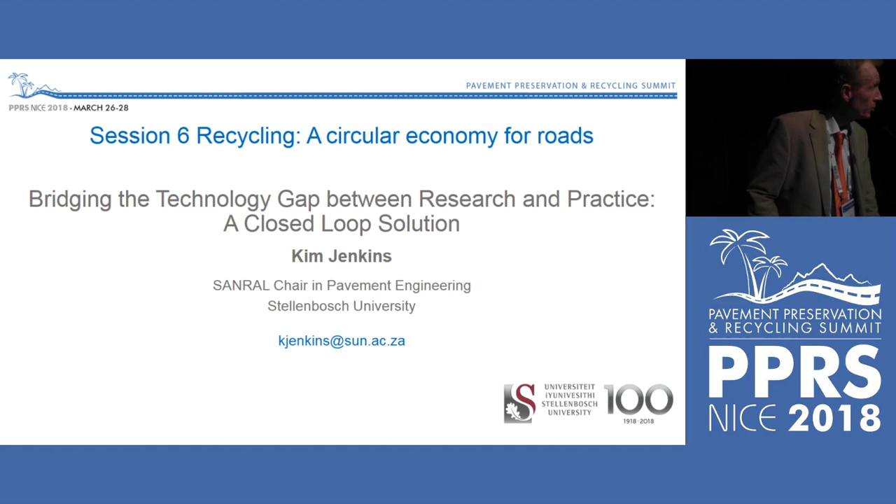Thank you for the introduction, and thank you to PPRS for this invitation. It is so encouraging to see the developments in these efficient technologies in terms of energy and emissions and other very important issues, and I would like to join in explaining some developments.

I have a four-part presentation where I would like to talk about, in particular, some of the problem solving, and as you can see, it's the typical loop solution to problem solving. With cold recycling, as we've heard from a previous speaker, there are some needs and challenges, particularly in mix design and pavement design as this technology matures.

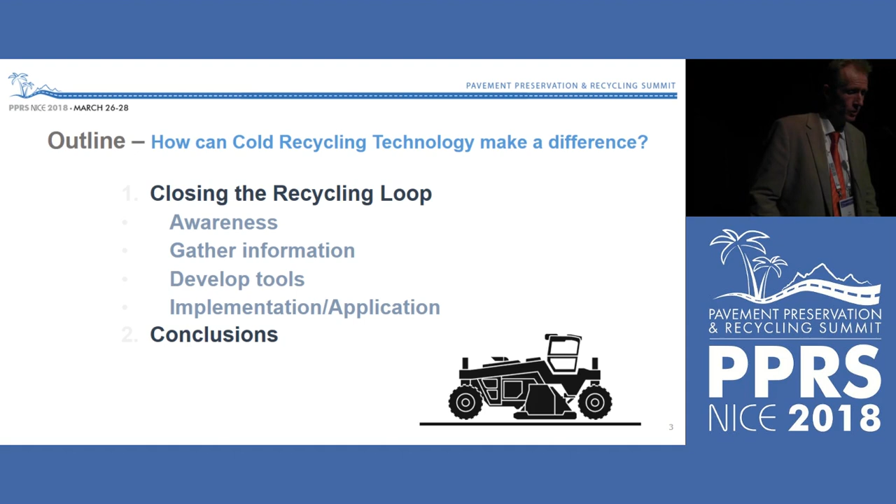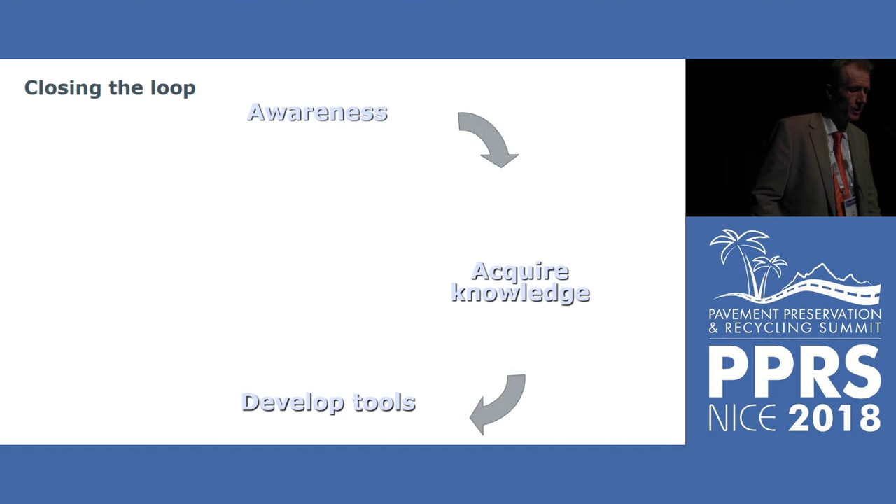So I'd like to take you through this loop. We know that we need to be aware of what the problems are. We need to acquire information and knowledge in those areas, then develop the tools and implement. But I think an area where we all commonly fail is in closing this loop and refining the technology.

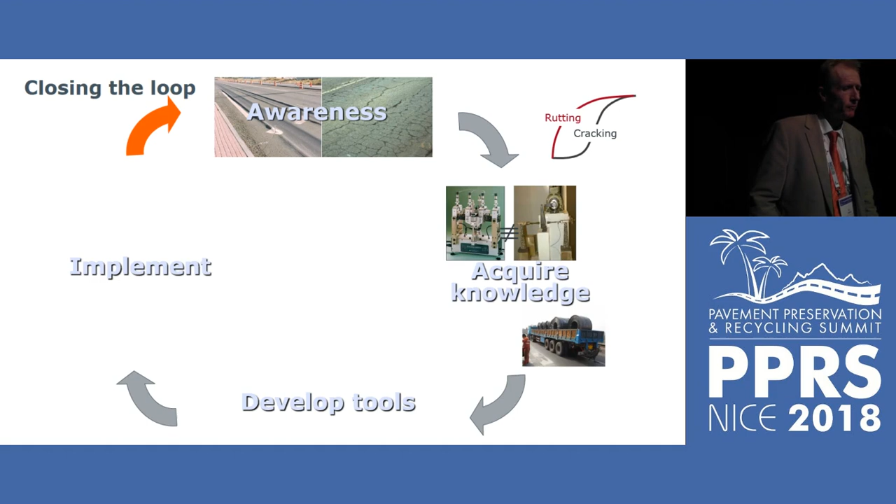So we're aware of the types of failure mechanisms. We know how to gather the information and acquire the knowledge and develop the tools, and I'll share a little bit about that with you. But then we implement, and that's generally where we stop.

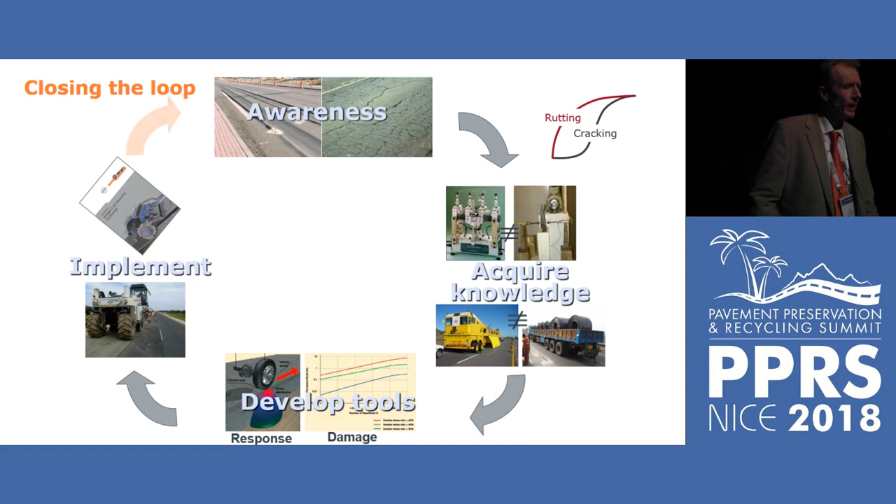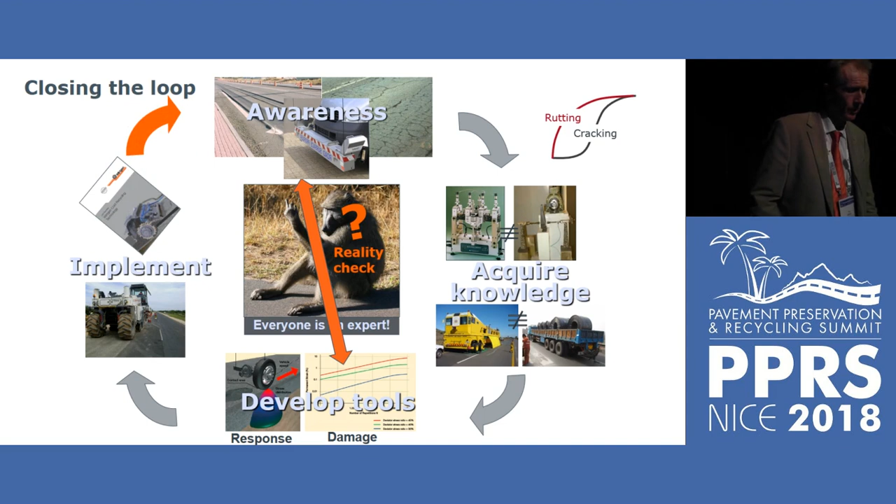And we are faced with criticism by people who don't enjoy our roads. So we need to close this loop, do a reality check of this implemented technology and how it performs over time. This is not like that sign that says 'free beer tomorrow' - if you don't close the loop, you go back again tomorrow and the sign still says free beer tomorrow. So we need to close this loop.

So in the first step, just awareness of the challenges we're facing - and I'd like to emphasize these numbers are conceptual. We know that globally there's on the order of 65 million kilometers of roads, of which about 18 to 20 million kilometers are surfaced globally.

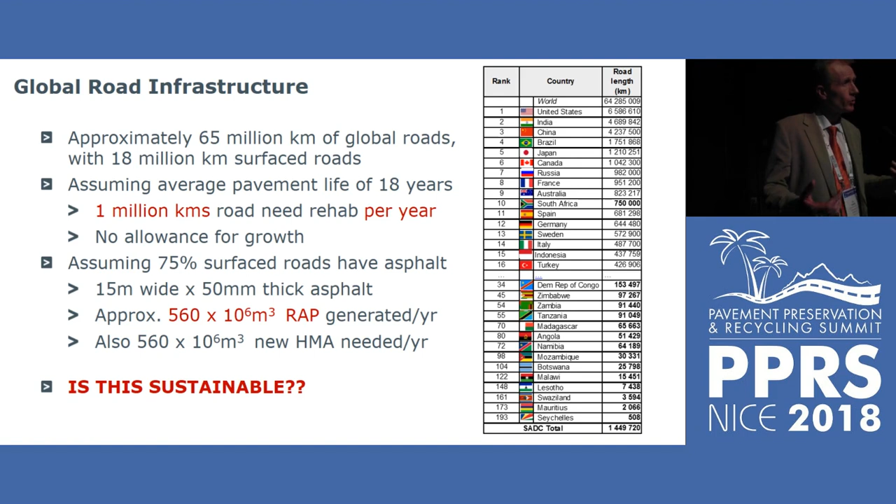I'd like to emphasize that there is such an important need for recycling and maintenance technology, because if we work on a design life of a road of 18 years, we're talking about 1 million kilometers in the world coming up for structural rehabilitation every year. Are we keeping up with that? I think this is a big challenge we've got to ask ourselves in all the different countries.

And then on top of that, how do we recycle these materials? Particularly with a focus on recycling asphalt, we could easily be generating about 500 million cubic meters of RAP per year. And how we use that RAP questions sustainability.

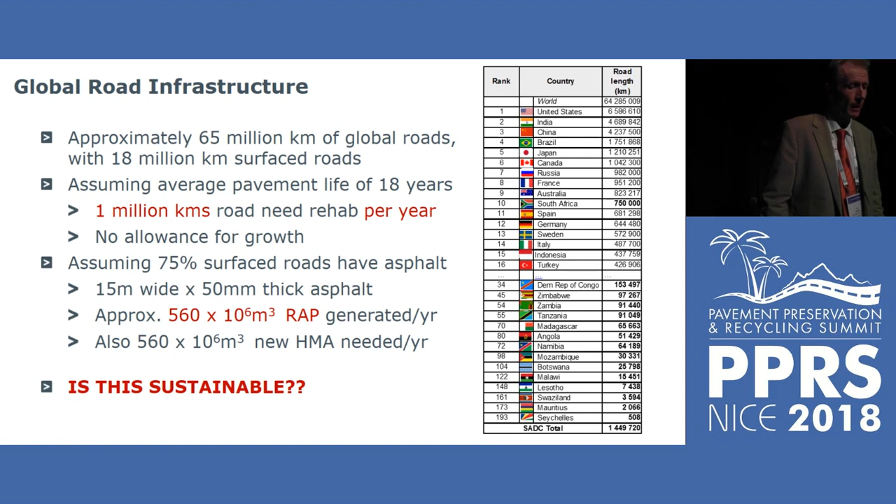There's a place for all technologies, as our first speaker explained, in this graph - two-dimensionally explaining the influence of aggregate temperature requirement on the horizontal axis versus the consumption of energy. Yes, there's a place for hot mix asphalt.

We've seen in the previous presentation the benefits of going the warm route and saving some energy. But there's nothing like working a bit further down that energy loop, where you're not having to vaporize the moisture and work in these lower temperature zones. A lot of researchers have shown 50% savings in energy as you move to the left of those temperatures, and in excess of 70% savings in emissions.

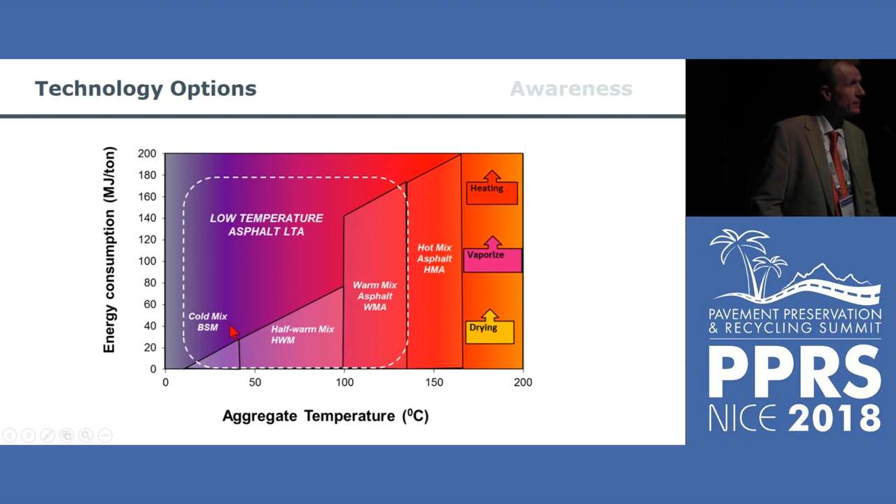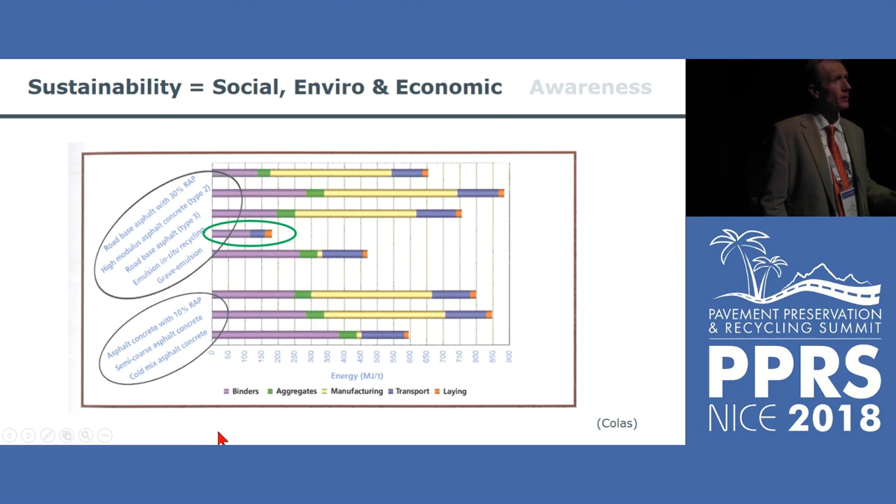So the question is, how do we optimize this cold technology zone on the left? I've borrowed this figure from very good work done by Colas some years ago - I'm not going to go into all the details, and many of you have seen this data, but it does emphasize that when one goes into the cold technologies shown here, one can look at the aggregated energy consumption, just as one example, to show the benefits of reducing temperature using these technologies.

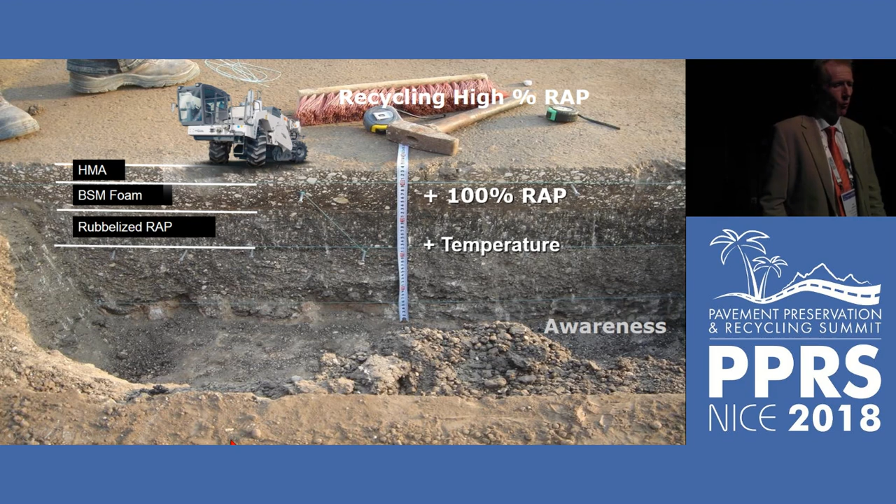Another question arises as part of this awareness: when dealing with RAP, the developed world is using between 50 and up to 100% back into hot mix or warm mix technology. In the developing world, a much lower percentage is used, and we need to look carefully at how that RAP has been implemented and where it goes.

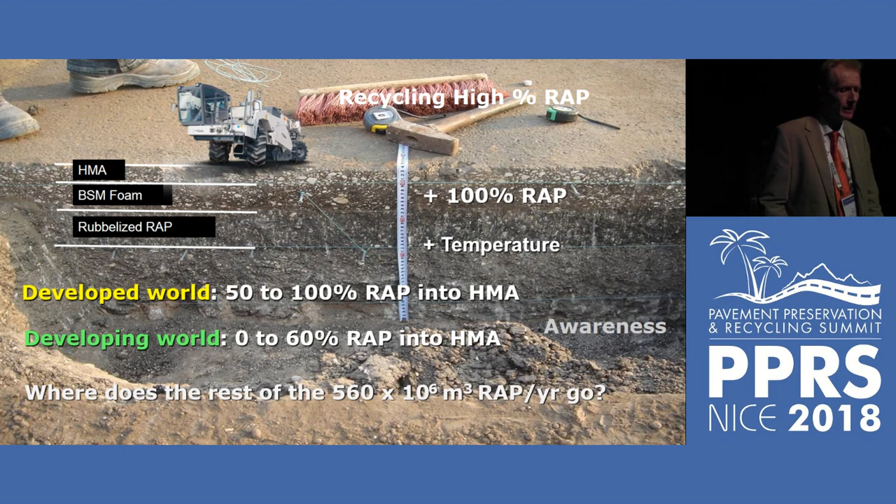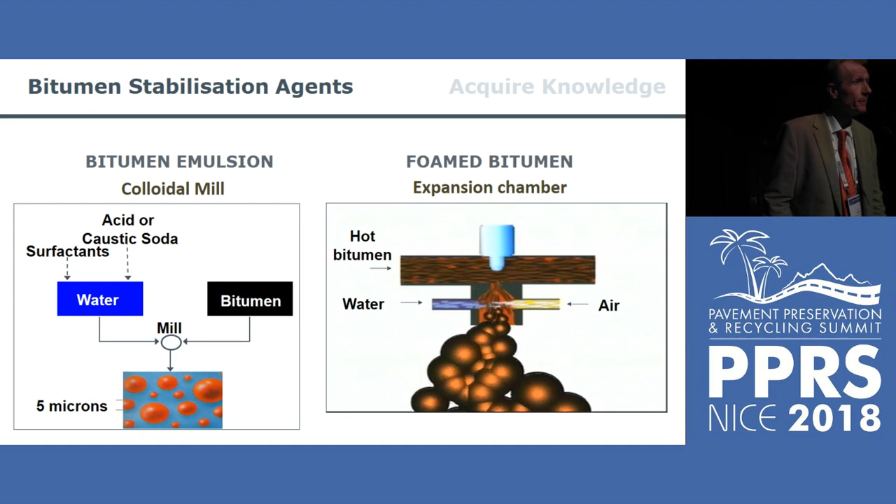In the second part of the loop, acquiring the knowledge, I'm emphasizing that if we're using cold recycling and want to create flexible, well-balanced pavements where bitumen stabilized materials support the more strongly bound asphalt layers on top, we have emulsion and foam technology. As we heard from the NCHRP study, the performance generated by these two technologies is very comparable. It comes down to the specific aggregates one's working with, the climate, and other considerations in decision making.

If we look at where these bitumen stabilized materials fit in a two-dimensional matrix, with bitumen on the horizontal scale and active filler, cement or lime, on the vertical scale, we know that as we move upward we get stronger, more rigid materials. As we move horizontally, we get more flexible but more expensive materials.

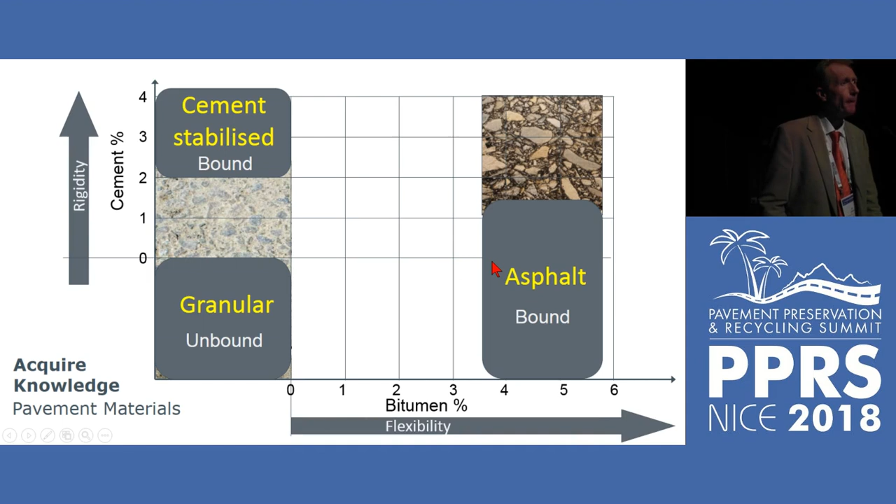This bitumen stabilized material, where the focus has been—and I don't say it's the only way it can be implemented—involves about half of the added bitumen content in these mixes, with a restriction on the active filler to keep these mixes flexible.

There's some sort of imaginary boundary between your primary distress mechanism, rutting below this line, versus cracking and fatigue above it. Yes, one can push more cement and lime into the material to take you across this line, but then you're dealing with a different type of performing base material.

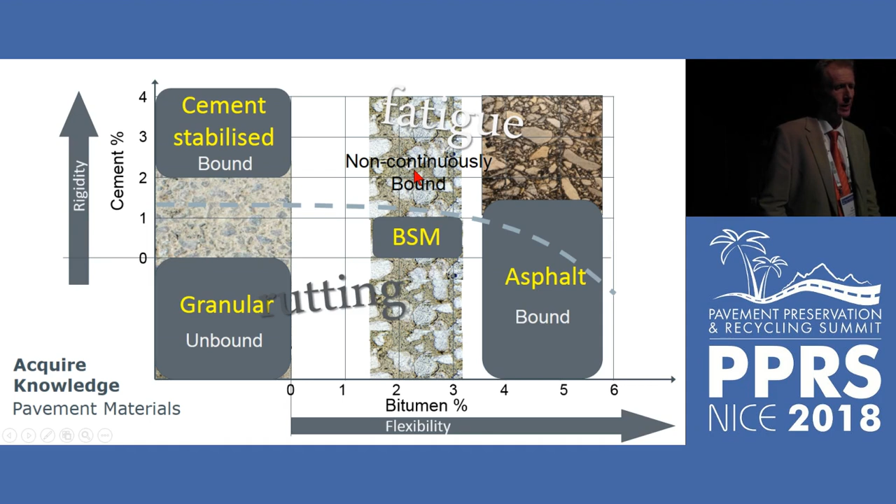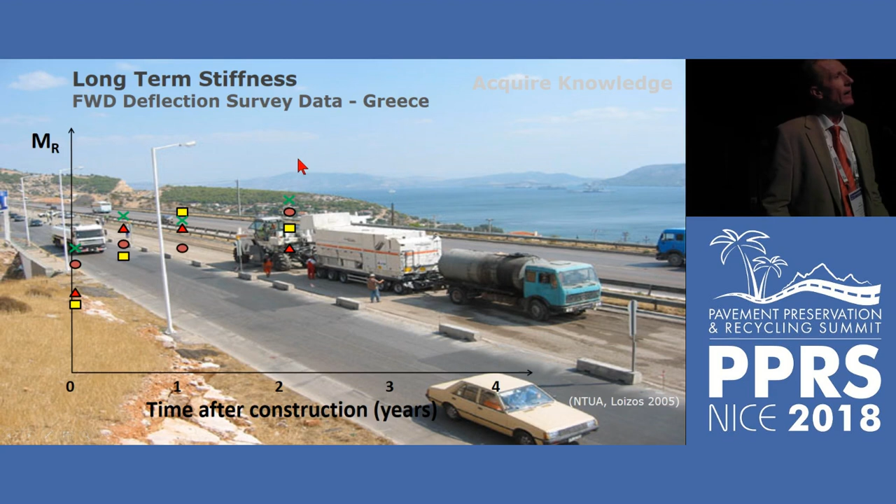We've also learned over time that what makes bitumen stabilized materials, whether foam or emulsion as binder, challenging is the resilient modulus. From many studies, we've seen there's initially an increase in stiffness as this material cures and loses some moisture.

This is a cold mix. It then plateaus, but will obviously suffer some damage over time. This is an example of a study over 4 years. In the background, you can see a highway in Greece that was treated in 2002-2003, and we're still gathering data on that pavement—still performing very well.

In terms of the technology, we've seen machines that can control the layer thickness very accurately, because here we're talking about a significant structural layer, which is one of our major challenges as well.

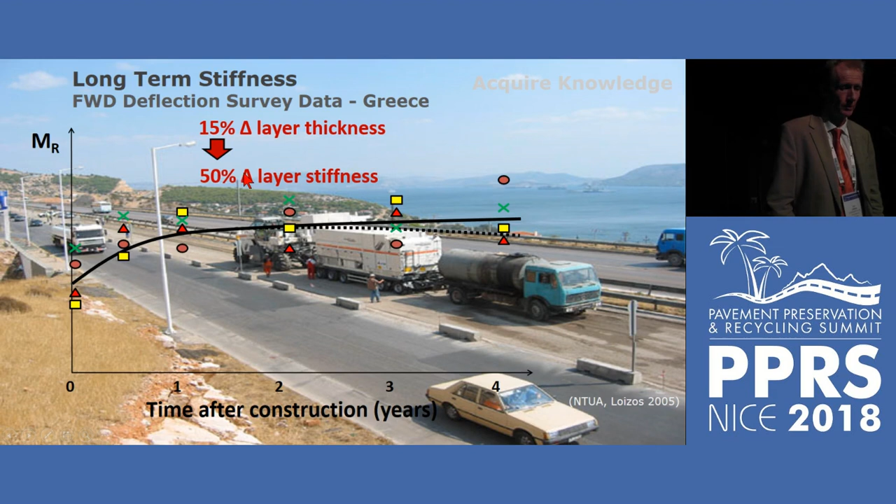In the world, and it was spoken about at one of the earlier sessions, this grey debt where the electoral cycle pushes on the structural investment in our pavements and just treats the top. We've got to do something about these pavements structurally, because it's not economical otherwise. So we need to get those layer thicknesses accurate.

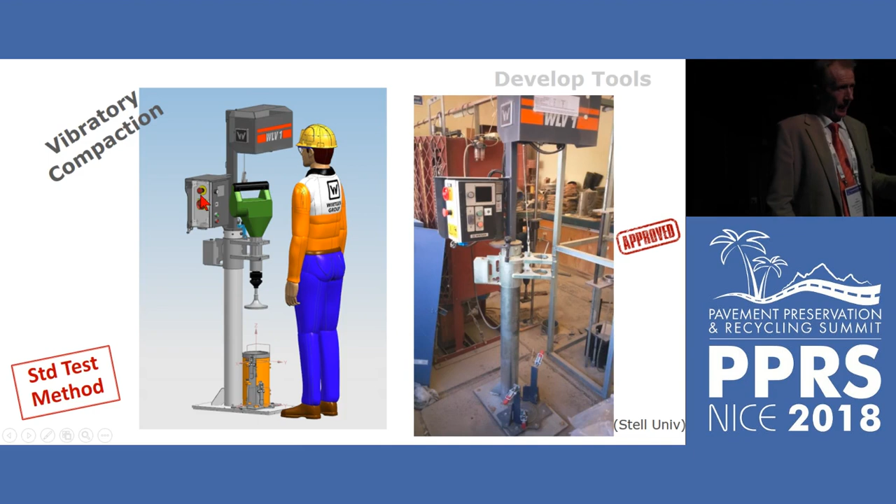In developing the tools from the data we've gathered, I'd like to share something that's come through many years of research—two decades at least—in various parts of the globe. We've recognized, working with these bitumen stabilized materials...

We started first with Marshall compaction, then went across to modified Proctor compaction. We realized we needed to simulate more closely the compaction that happens in the field, which is with vibrating rollers. So a system was tested, we researched this, and it's been independently implemented as a commercially available system using a vibrating hammer with similar amplitudes and frequencies as the vibrating rollers, simulating a much closer packing in this material.

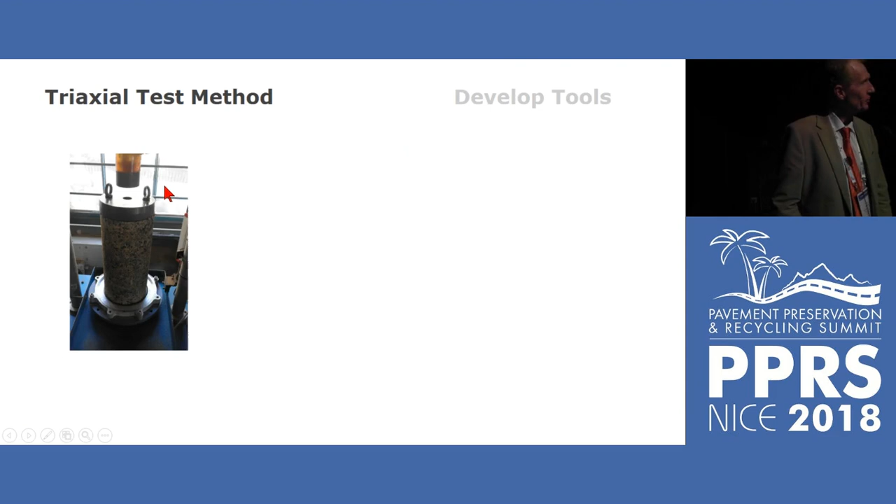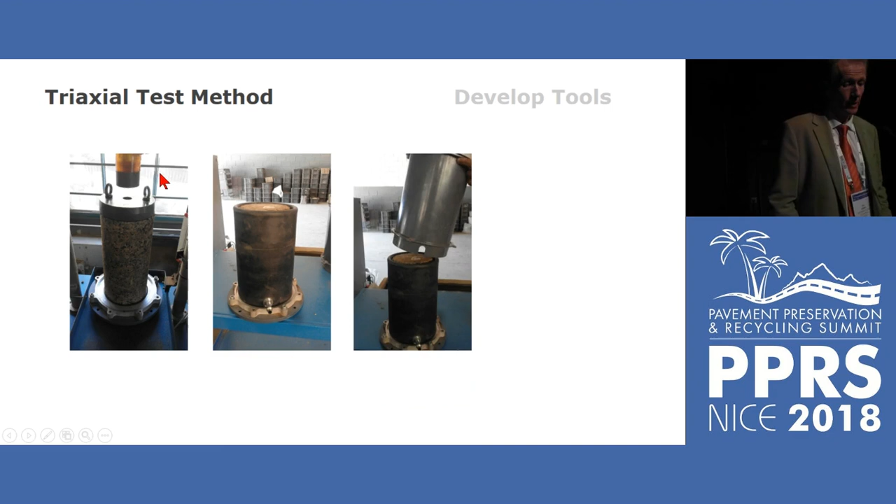In the subject area we share, the geotechnical background, we've also recognized the importance of how we test these materials. That two-dimensional matrix showed that BSM is not granular, although it has some granular characteristics, and it's not asphalt—it's not continuously bound. So it needs proper evaluation tools, and what we found is triaxial testing is a very reliable way of testing the performance of these materials.

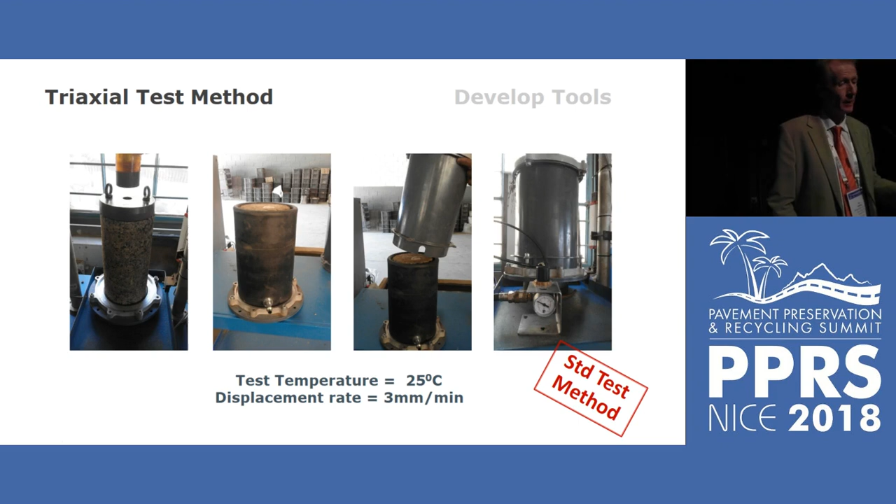So we've developed a simple triaxial testing system, and it honestly isn't any more difficult than doing an ITS test. It takes some more material, but the process is working very nicely. So what do we get out of this? Well, we get Mohr-Coulomb circles, and Mohr circles, and Mohr circles—we do a lot of Mohr-Coulomb plots. And what do we see from these tests?

Typically now in mix designs, we are using these tests, so they're for decision making—this is not just in the realms of research. At 4 different confinement stresses, as you can see—0, 50, 100, 200 kPa—and we'll do 2 repeat tests. So you use 8 specimens to get your cohesion and friction angle, your 2 primary shear parameters.

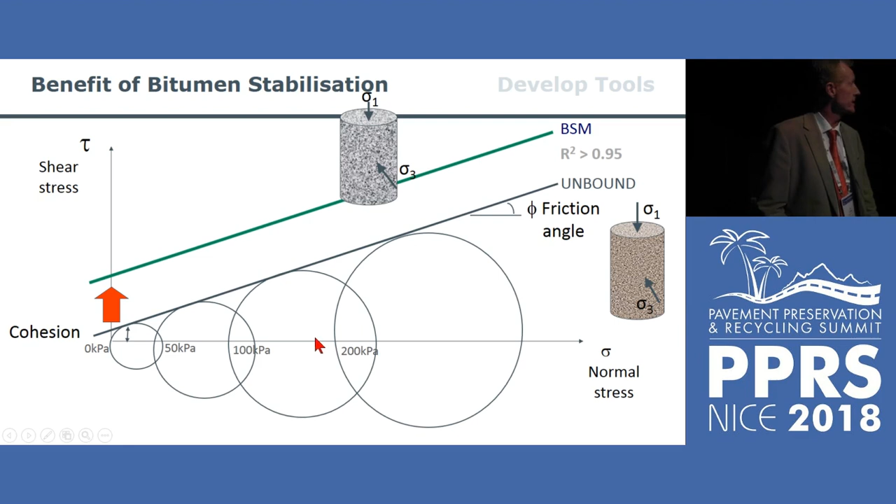What one sees from a granular to a bitumen stabilized material is, because they're non-continuously bound, you still retain the friction—unlike asphalt. You haven't got a film of bitumen separating the materials. Here you've got, if I can say, flexible spot welds of bitumen. However, the added benefit of this flexible bitumen is giving you a kick in the cohesion, pushing up your shear failure envelope.

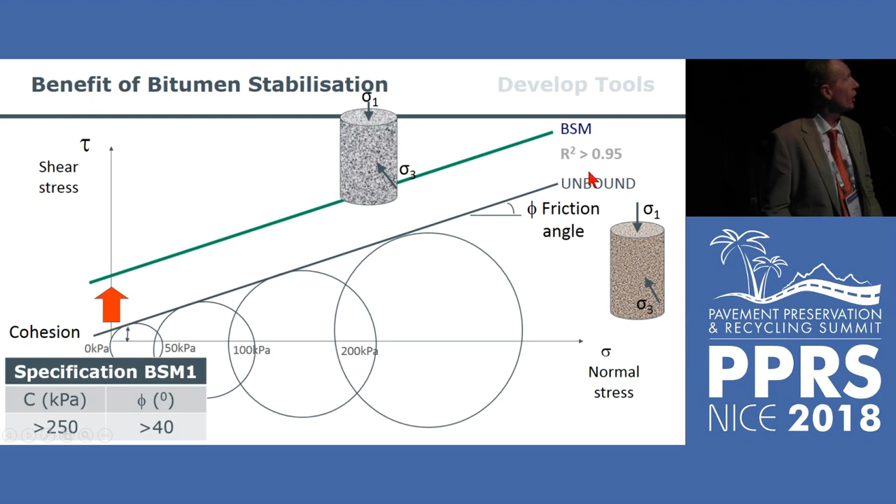Specifications have been developed for these bitumen stabilized materials. What we've found with this compaction system and a standard curing system is that we get very good coefficients of variation in the materials, which is very encouraging from those tests. We've done more than 200 different mix designs using the system now, and with small refinements, we're getting very reliable results.

The question often arises: since it's not asphalt and you're not coating the bitumen, surely it's susceptible to moisture. Well, we need to evaluate that as part of the mix design. What one does is for another 2 of those triaxial specimens—so we tested 4 in optimal conditions—then 2 of them we test after conditioning in moisture for 24 hours.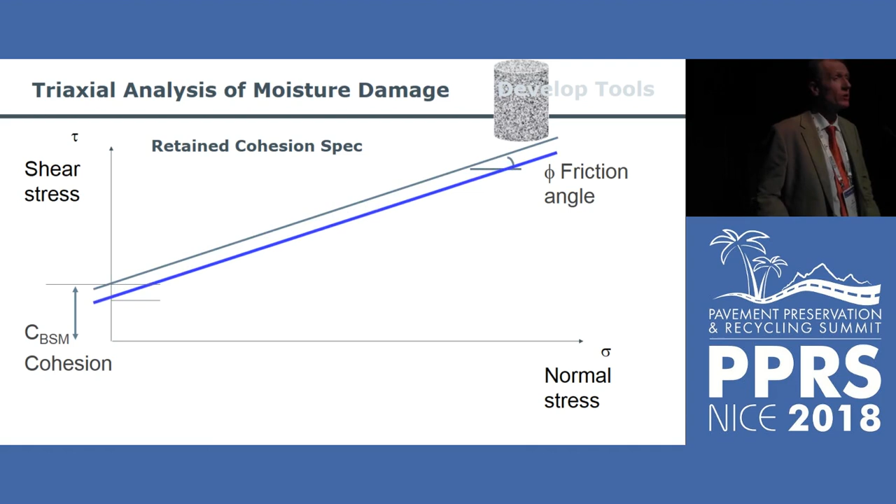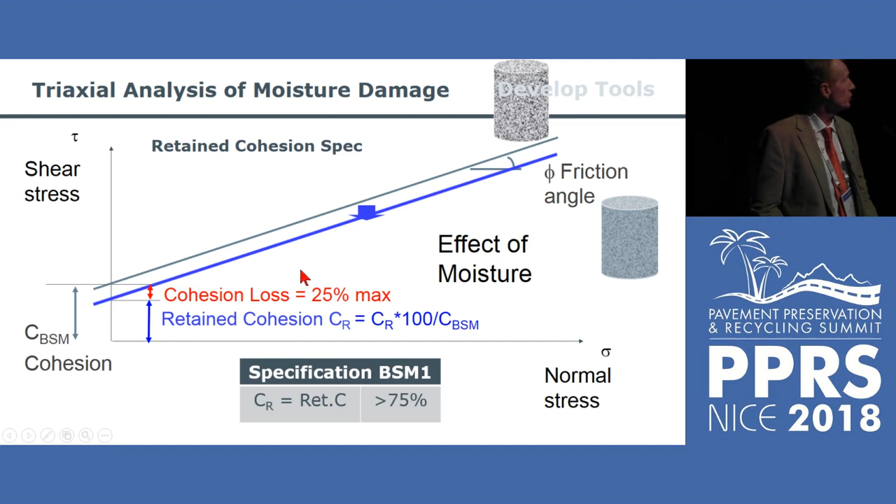What you will see is a reduction in the cohesion of that bitumen stabilized material. And that can be specified—we can limit the amount of reduction that is allowable, and that's exactly what we do. So we say you can only lose 25% maximum of the cohesion in the material.

Just 4 quick examples of some of the benefits of moving to the triaxial and not just using ITS testing, indirect tensile strength, as part of the evaluation of these mixes. But I must clarify, we still use it to do the initial mix design tests, where you look at what sort of active filler works best with the aggregates you are using in your bitumen stabilization, and what is a typical optimum binder content. Then that potential mix is taken forward as a composition that's evaluated, with only one variable in the triaxials.

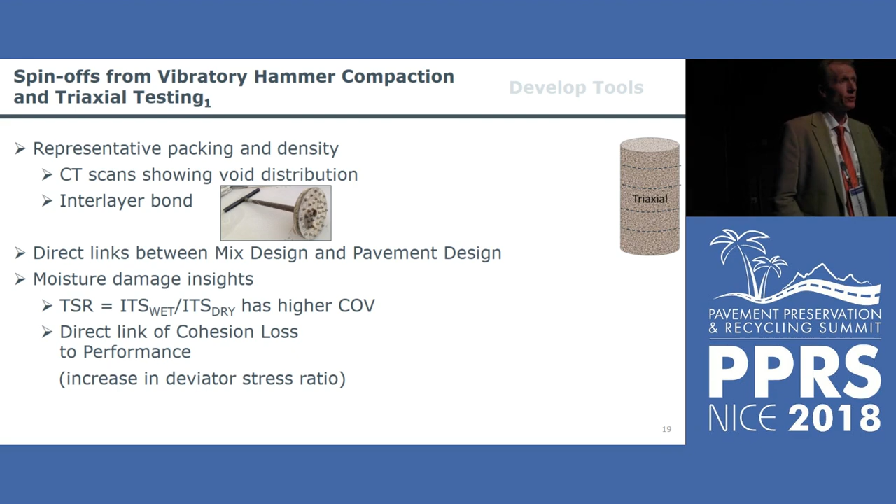A second area is, and I'll show you in a minute, the shear strength of the bitumen stabilized material can be used directly in performance prediction. An ITS value has not got a very strong link with the performance of the material in the road.

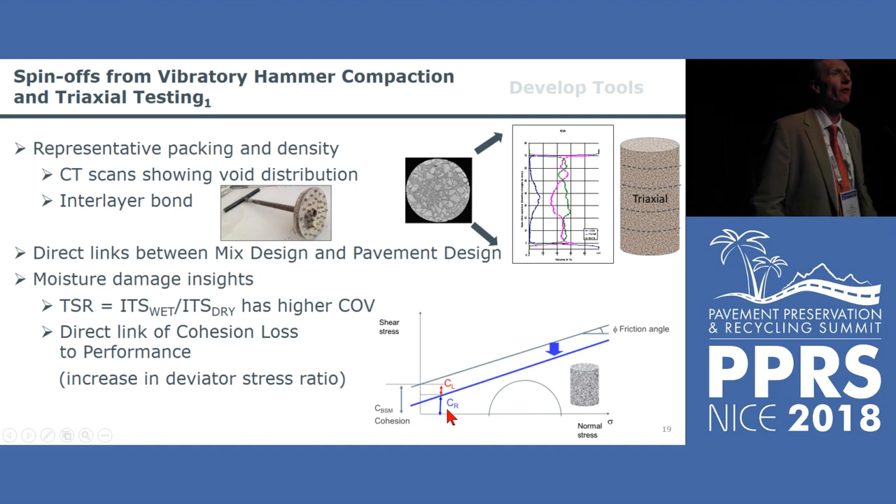We've also seen that the moisture damage testing is providing us with reliable insights into the moisture damage of these mixes, tested with realistic accelerated testing and moisture exposure. So those limits are promising.

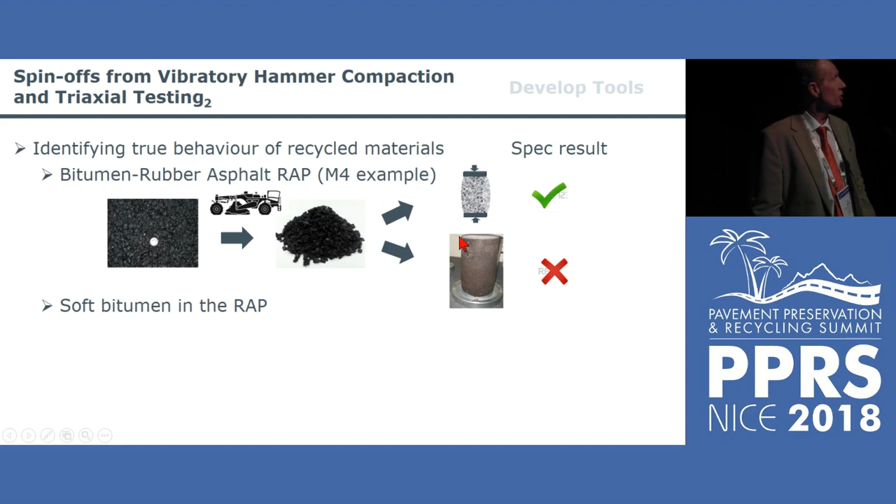We've also found in cases—this is with recycling projects where RAP has been used that's been modified, so it's not an unmodified binder—where the ITS results looked promising in terms of our specification requirements, but a red flag came up when triaxial tests were done, and it was found that some adaptations to the mix composition were needed. So just basing decisions on the ITS values in this particular case would have led to disastrous performance.

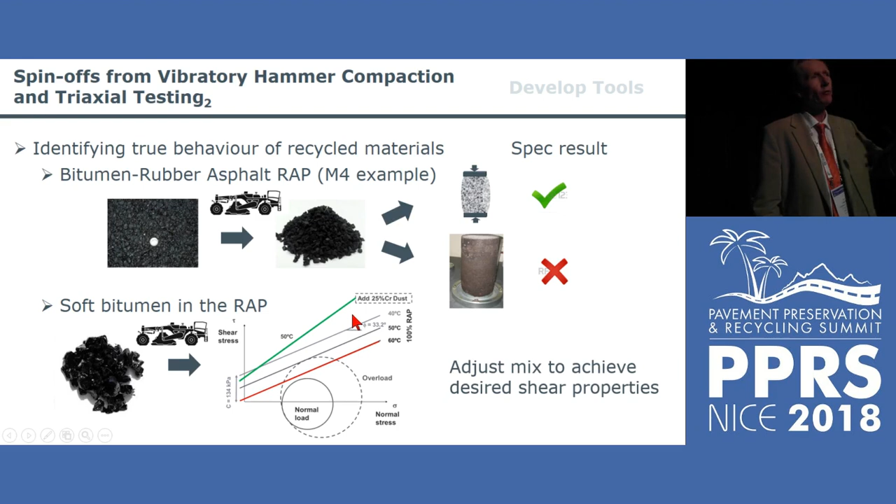Another area is how to optimize the mix. So if one's working in a hot region, what we learned is that although we do these triaxial tests at 25 degrees Celsius as standard, one can adjust that temperature if you are anticipating using the mix in a hot region. This can link to something mentioned in a previous presentation, where you be careful of using 100% RAP where the binder of the recovered RAP is still relatively soft. One will pick it up in this test, but there are solutions in blending with 25% crusher dust, which is going to fit into that sand matrix of these mixes.

Conceptually, how do the mix design results fit into the structural design? Well, one analyzes the pavement structure, and particularly we look at the principal stresses in the bitumen stabilized layer. There we can again rely on the Mohr-Coulomb plot, where we can plot the Mohr-Coulomb circle, the green one, which reflects the actual stress applied.

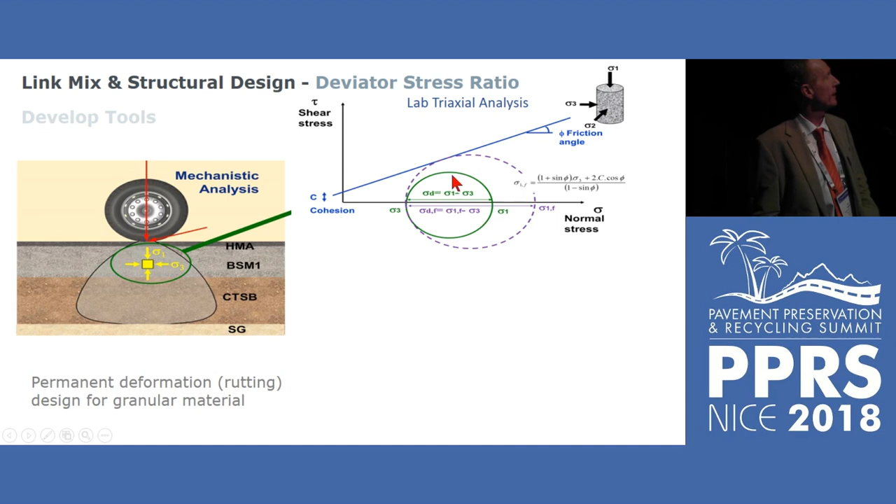From the mix design, we've got our failure envelope, so we can get a deviator stress ratio, because we can calculate what the deviator stress would be, which would be the diameter of the dashed purple circle. The ratio of those two is what we call the deviator stress ratio. As we know, the rate of rutting that takes place in these mixes is directly proportional to the stress divided by the stress at failure, if I can put it simply like that. So that deviator stress ratio is a critical performance parameter, which we can get from analysis and from mix design.

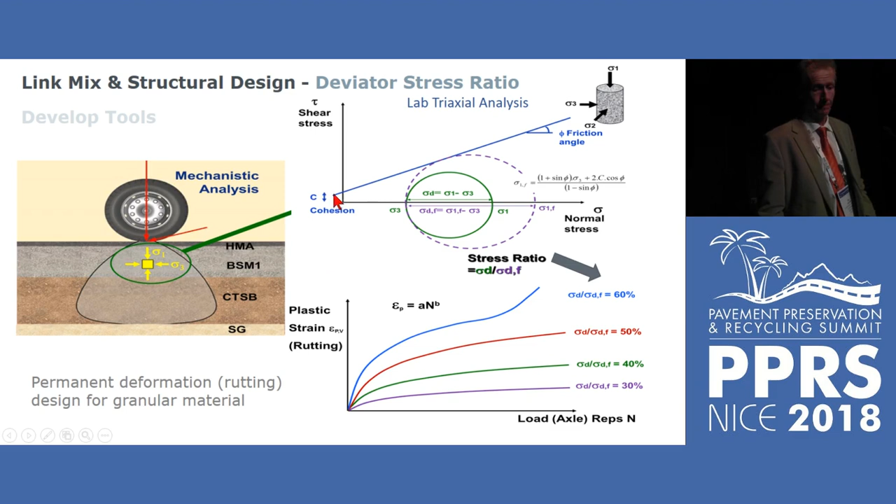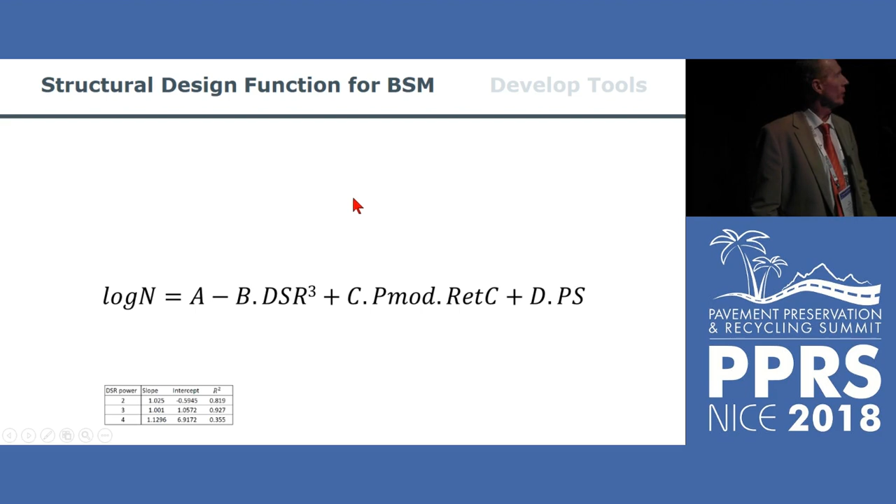And we can therefore limit the damage. The next step we've taken, and this has come out just recently, is one of our studies based on 25 separate road sections of 15 different regions and structures, all including either foam bitumen or emulsion as binder. Most of these areas are older than 15 years—they've been performing under traffic for 15 years. We gathered that data and then developed a mechanistic empirical design function.

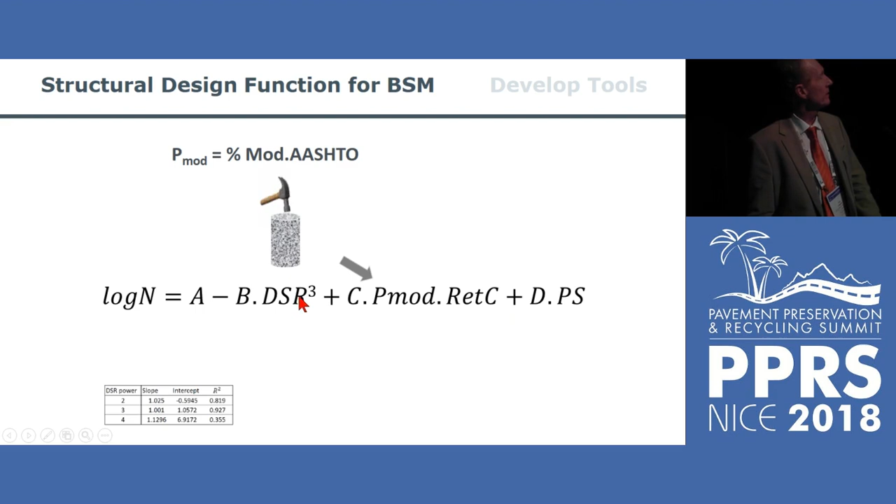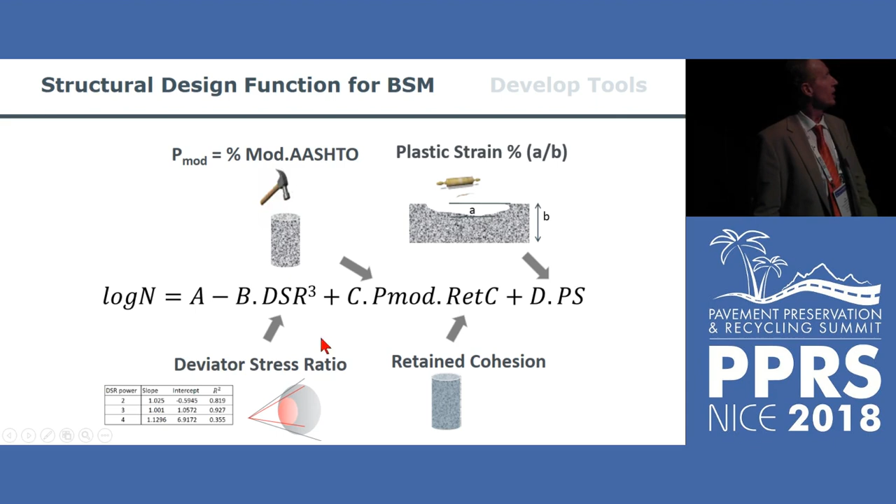So this is the number of standard axle repetitions, and A, B, C, and D are just material coefficients. We've got the 4 input parameters: the density of the material, the allowable plastic strain—which is going to limit to, for example, 10 millimeters of permanent deformation—the retained cohesion, which is a property of the moisture resistance of the material, and this deviator stress ratio. That combination of parameters goes into the design function and helps you to accurately calculate the required thickness.

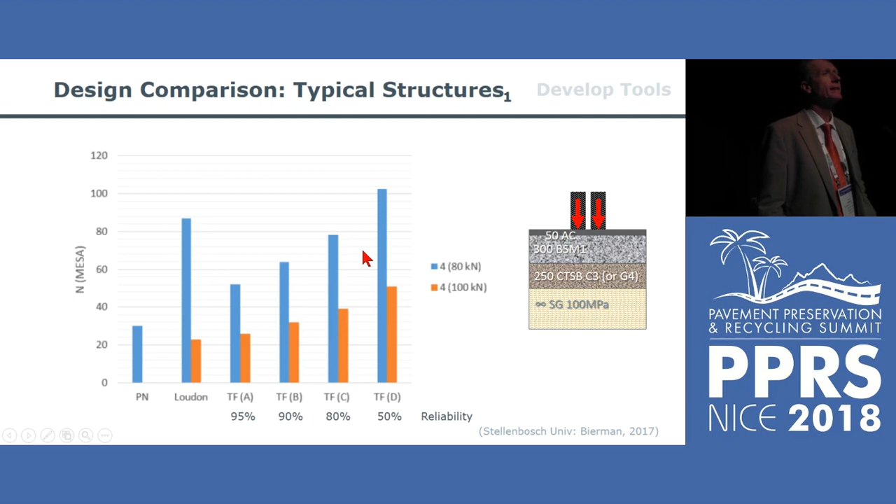We've compared it with alternative design functions that we have been using previously and found a conservative nature in some of the other design functions, and also less strong links with performance in the pavement. So it's encouraging to have a more robust design system.

Finally, Mr. Chairman, I'd like to get to step 4, which is the implementation and closing that loop. This technology has been applied, and I'd like to give you one example of an area where it was used: cold in-plant recycling, which was an extremely challenging project.

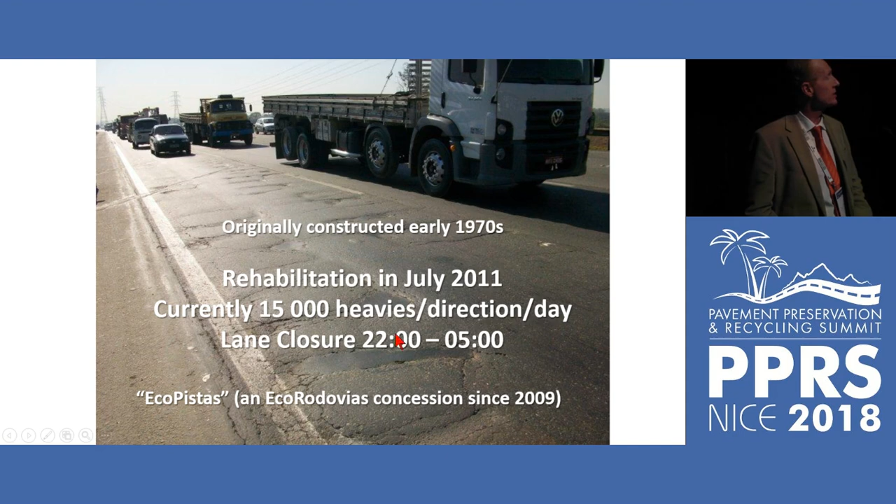It was in Sao Paulo, and I got involved with a colleague in a project on the Ayrton Senna Highway, near Sao Paulo, going in the direction of Rio de Janeiro. As you can see, very heavily trafficked roads. Another restriction was the time available, so you've got 7 hours to do the project. This is what you're facing. It's a concessionaire, one of the areas with less barriers to change and more welcoming of innovation.

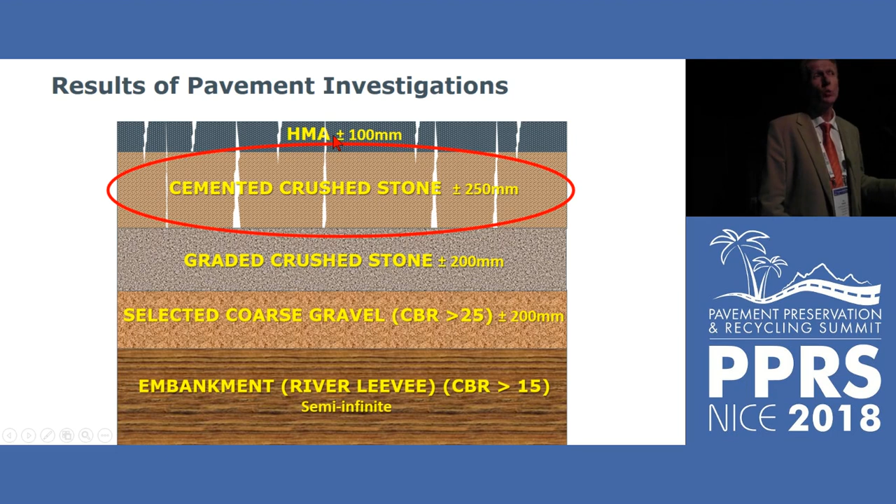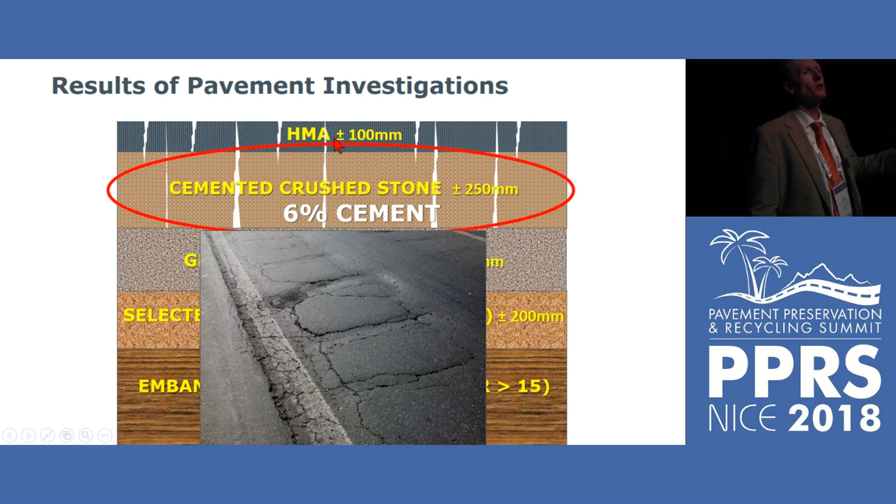The challenge was that the problem lay in the top 350 millimeters of the pavement, the highly cemented base layer which was cracked, and the holding measures and maintenance being carried out by the concessionaire would last anywhere between 9 months and a year and a half if you're lucky, because milling off the asphalt and replacing that 100 millimeters of asphalt would just get reflective cracking. So how does one treat a pavement like this? You've got to treat the whole problem, 350 millimeters, and you've got 7 hours to do it. You can't pave 350 millimeters of asphalt in 7 hours and open to traffic.

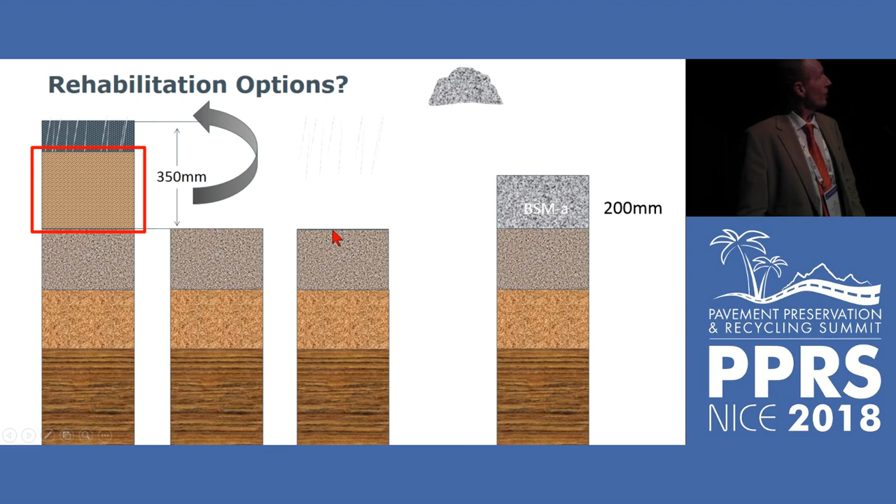So what was implemented, what our suggestion was, do a trial section, we'll see how it performs. The solution was: take off the asphalt, put it into stockpile, so we've got RAP. Then take off the cemented layer, put that into a separate stockpile. From a previous stockpile, we do an in-plant mix and pave back 2 layers of cold mix bitumen stabilized material.

200 millimeters, paver laid, then a second 130 millimeters. And then the solution from the asphalt manufacturers was a temporary 20 millimeters of surfacing, and then you can go to church and pray, because you've got 15,000 vehicles waiting to come down on you the next morning at 5 o'clock.

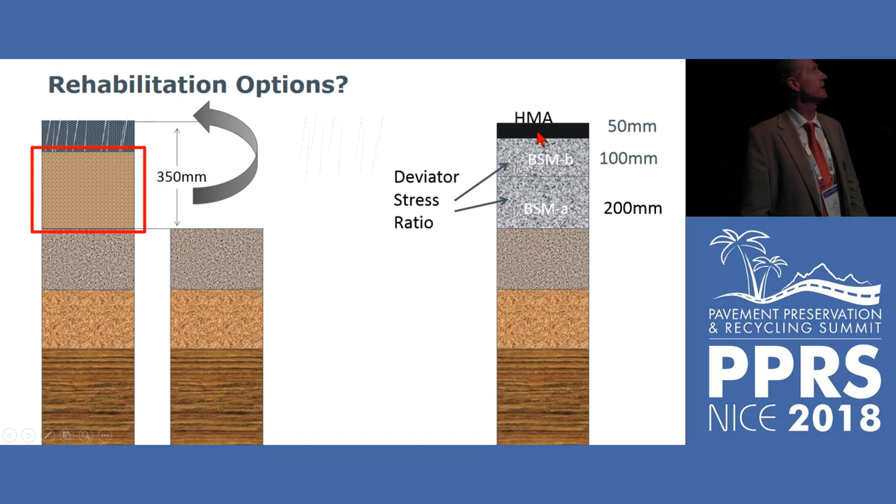So we used the same design system for this project, that deviator stress ratio. The idea was that within 3 to 6 months, one would need to mill off that sacrificial layer and repave it with a 50 millimeter solution. And I'll explain to you exactly what happened in the end.

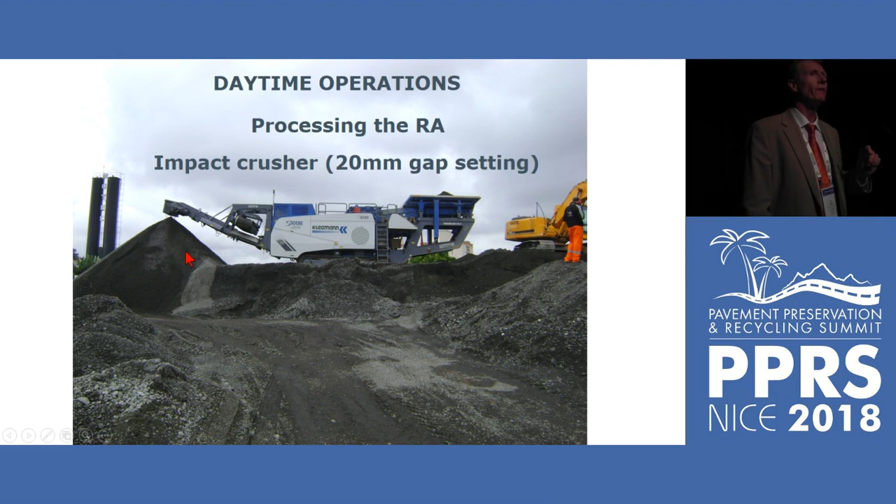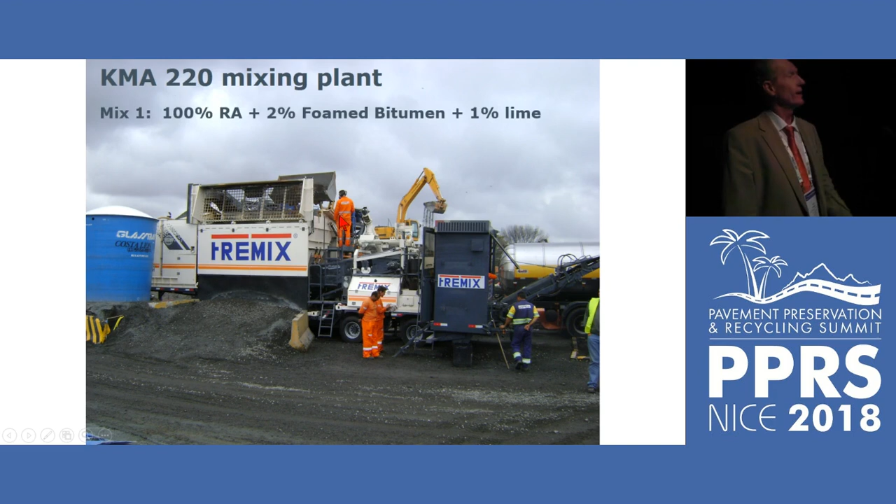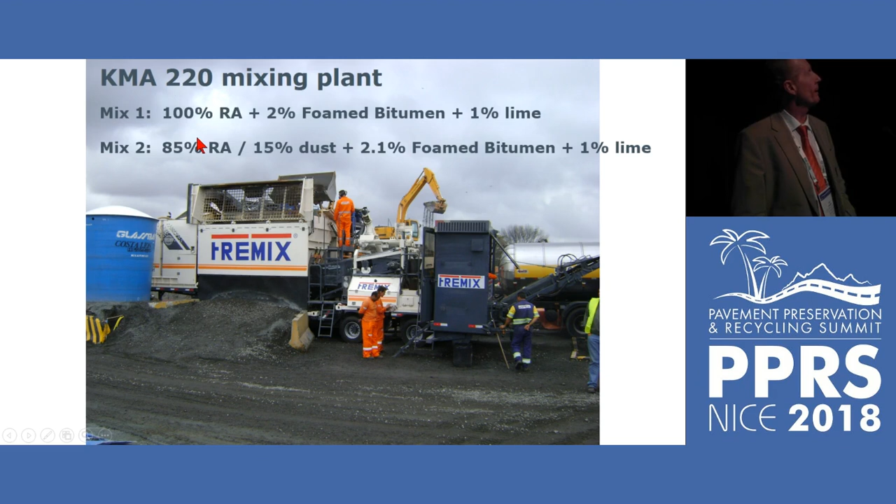So very briefly, to fit in with the proper implementation of this technology, one needs to process the RAP and have very good quality control with the grading. It went through a mobile impact crusher, very low transport, this was alongside the highway, and then into an in-plant mixer. There were 2 different mixes, and ironically, happily, it fits in with what was said in previous presentations: the bottom layer of 200 millimeters was 100% RAP, 2% foam bitumen, and a percentage of lime. The second mix above that required a bit more shear strength: 15% crusher dust and 85% RAP, just to give it some more shear strength in the upper pavement.

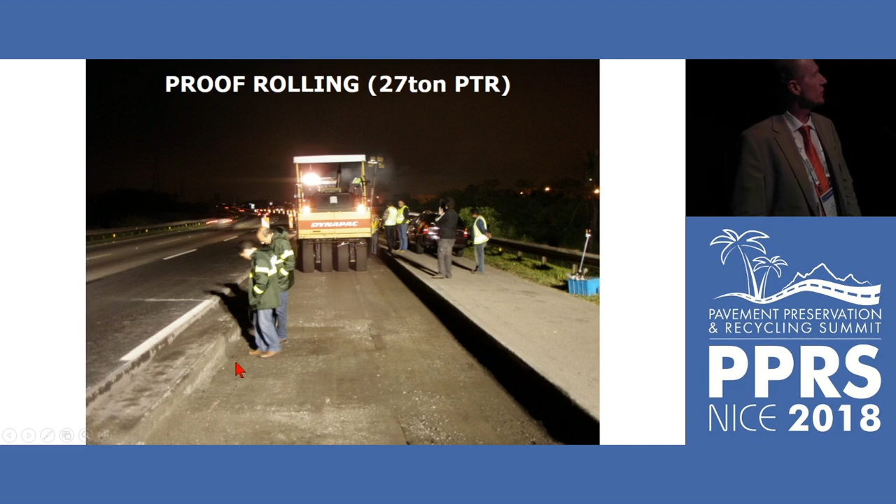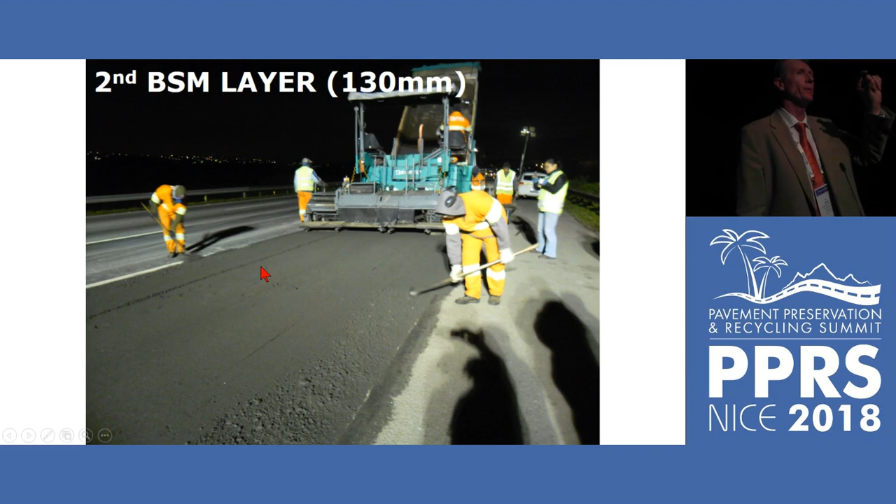Just a few insights into what the project looked like. This was the slow lane, and you can see the milling off the asphalt and then the 250 millimeters of cement stabilized layer. This is already the second layer, paver-laid, 85% RAP with the foam bitumen stabilization, leaving a 20 millimeter step where the asphalt can fit in flush with the layer alongside. And that's doing the final compaction just before opening to traffic.

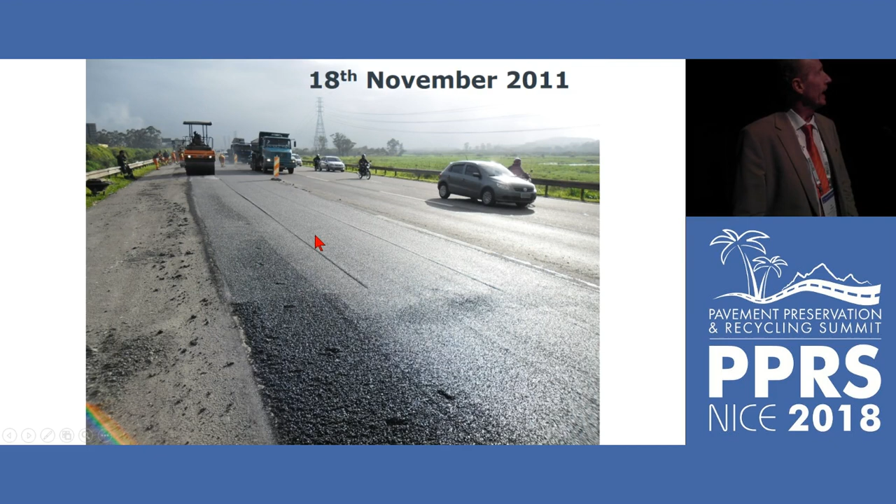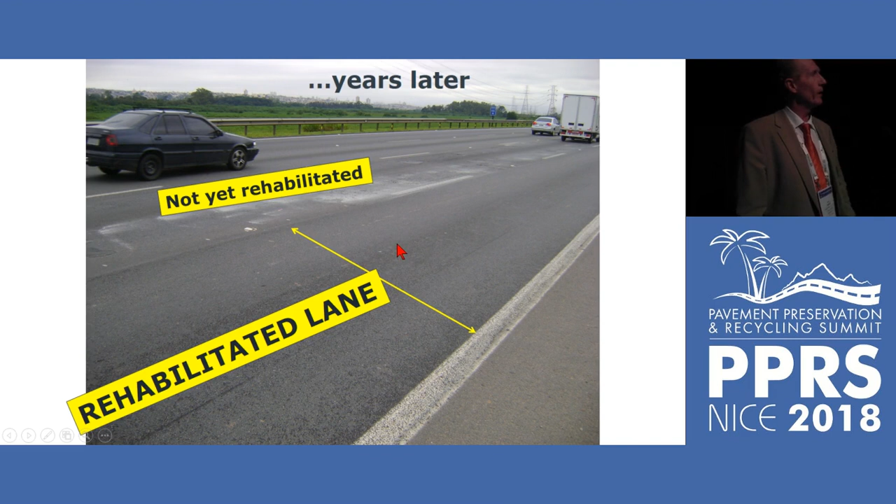This is what that layer looks like years later. It has now been down for more than 4 years, some places a little bit longer. This lane has now been rehabilitated, but only in one section to satisfy the concessionaire. That 20 millimeter asphalt layer was milled off and a 50 millimeter one was placed, but more than 150 lane kilometers have been constructed, and somehow that 20 millimeter asphalt is still sticking to the top of the bitumen stabilized layer. It's a bit of an extreme example. I prefer the calmer examples of this technology, but it just shows the flexibility of being able to use cold recycling in the right way.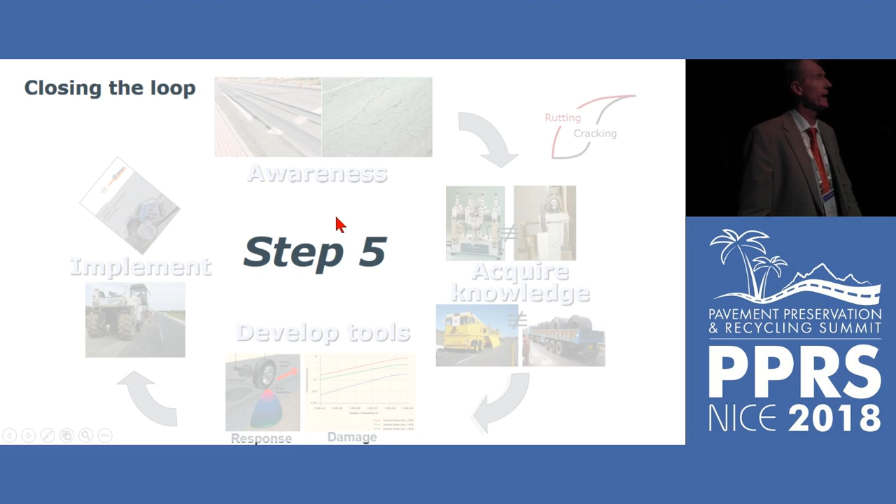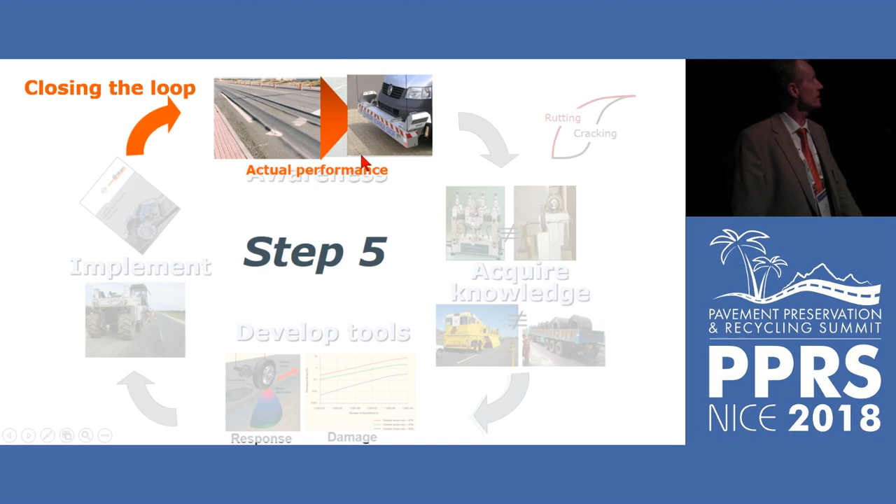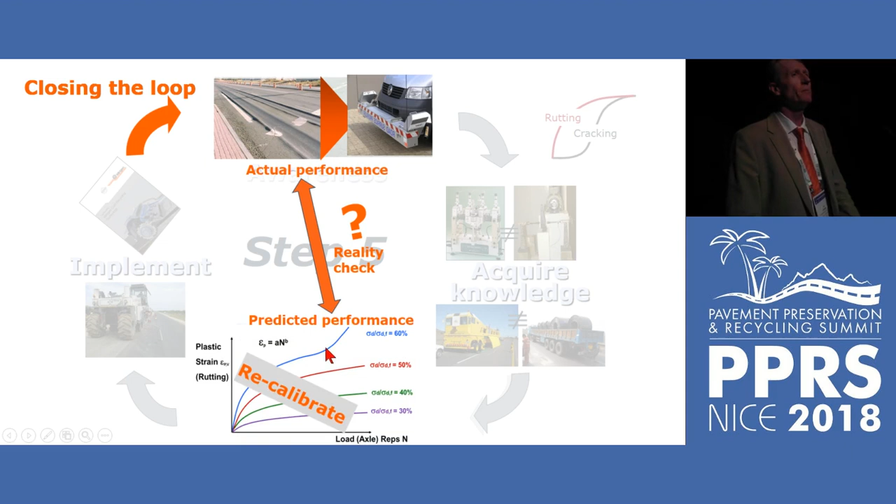So closing the loop means monitoring those sections over time, and this is what we're doing in updating our design systems currently: monitoring the actual performance and whether it's measuring up with the design models it was based on. I think this is a very important part of the closing the loop that has to happen with these new and innovative types of technologies. So, Mr. Chairman, thank you very much for your attention. As you've seen, in mix design and pavement design, there are more reliable ways of implementing this technology.